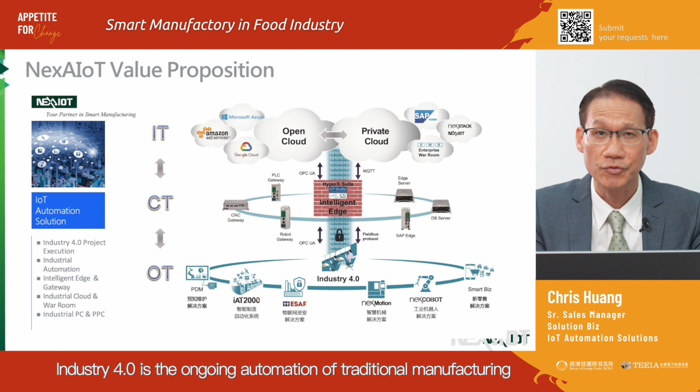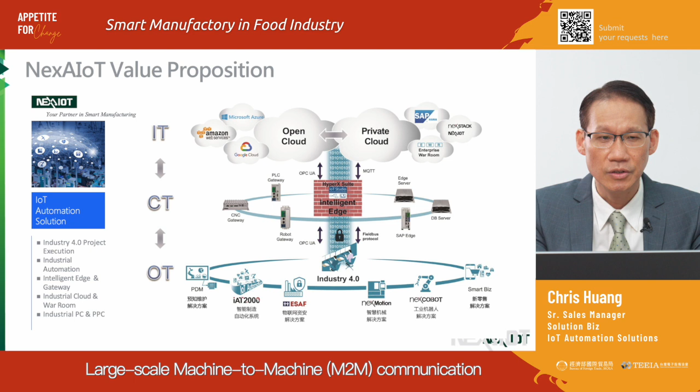NexAIoT value proposition: Industry 4.0 is the automation of traditional manufacturing and industry practice using modern smart technology. Large-scale machine-to-machine communication and Internet of Things are integrated for increased automation, improved communication and self-monitoring, and production of smart machines that can analyze and diagnose issues without the need for human intervention.

NexAIoT value proposition: NexAIoT products cover Industry 4.0 solutions and focus on Industry 4.0 project execution and service. In the current situation, most traditional manufacturers are located in the low OT layer, which includes product manufacturers, machine makers, automation, production lines, and retail solution providers.

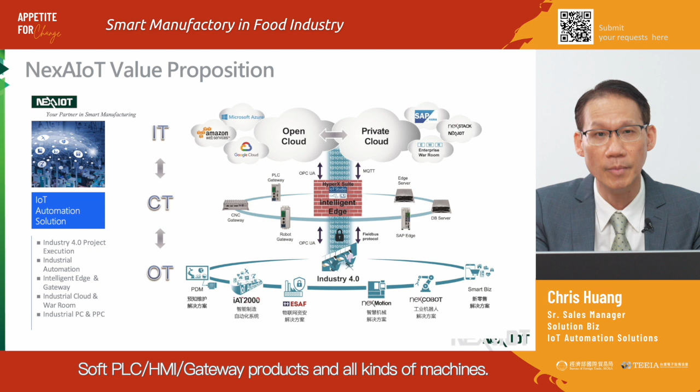In the OT layer, Nexcom provides PC-based controllers, software PLC, HMI, gateway products for all kinds of machines. In order to enhance the intelligence of OT layer solutions, Nexcom offers a wide range of gateway products, such as CNC, robot, and PLC gateway.

Additionally, they provide the Edge server and DB server products that facilitate seamless connectivity between on-site equipment and the control room server, as well as enable the secure transmission of data to the cloud.

For the IT layer cloud-based solution, there are open cloud and private cloud options in the market. Open clouds are Google Cloud, Microsoft Azure, and Amazon. Private clouds are SAP, NexSTACK, or other private company clouds. iAT2000, cloud SCADA, and automation system.

Automation and machinery system: to implement traditional manufacturing and improve efficiency, Nexcom has HMI, PC-based controller, software PLC controller, and redundant PLC product solutions.

Integrated system: to collect local data information from the field side, Nexcom has PLC gateway, CNC gateway, robot integration gateway to get machine data into Edge server computing or iSCADA.

Edge service: Nexcom Edge server specializes in collecting data from machine, PLC, and local devices, and presenting the result on iSCADA. Moreover, their solution goes beyond simple visualization, as they also enable seamless integration of data into the cloud.

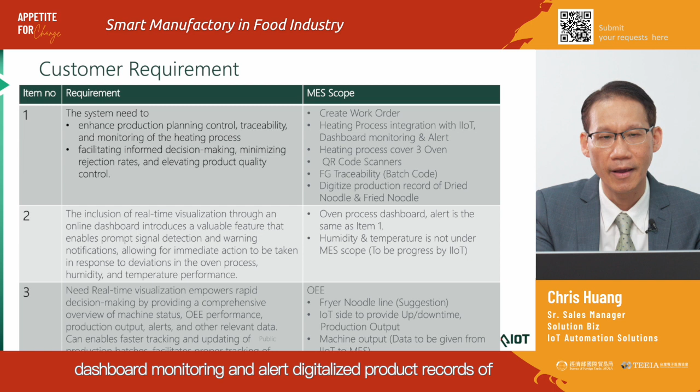Implementation by MES system: it can create work orders, monitor the heating process, integrate with IoT dashboard monitoring and alerts, and digitalize product records of dry noodles and fried noodles.

Number 2: need real-time visualization, empower rapid decision-making by providing a comprehensive overview of machine status, allowing for immediate action in response to deviations in oven process, humidity, and temperature performance. The implementation of these requirements, the oven process dashboard alert, is the same as item 1; humidity and temperature will be processed by Nexcom IIoT.

Number 3: need real-time visualization, empower rapid decision-making by providing a comprehensive overview of machine status, OEE performance, production output, alerts, and other related data. This enables faster tracking and updating of production batches, facilitates proper tracking of material flow, and allows for swift decision-making to predict delivery timelines more efficiently.

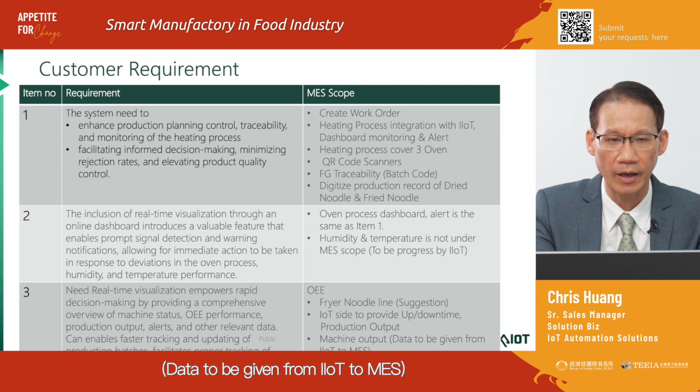Implementation by OEE system: Nexcom IoT side provides uptime/downtime, production output, and machine output data to be given from IoT to MES.

Number 4: implement IoT and weighing QR system in the premix line to have real-time data connectivity to server and MES. The QR code combined with weight data will be verified before continuing the mixing process. The MES scope will be recipe control with weighing machine integration for the premixing line. The total premix and mixing station will need 3 PCs, 1 barcode printer, and 3 scanners.

Number 5: integrate IoT hardware, sensor devices, and QR code scanner in the oven heating line. This will improve real-time monitoring of temperature and ventilation status with intelligence features for prompt alert systems to show abnormality in the oven process, reducing unnecessary downtime. Real-time data hourly auto-records the temperature result, and QR code accurately traces the trolley for heating time process. The above requirement will be integrated with the Nexcom IoT software.

Integrate the existing ERP with the production MES system, which will integrate automated stock code master software. Number 6: integrate the existing ERP with the production MES system. To satisfy this requirement, the Nexcom IoT team will integrate the existing ERP with the production MES system.

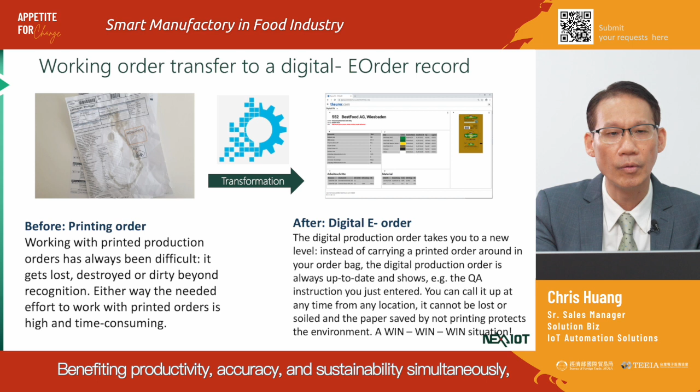The adoption of digital production orders elevates operational efficiency to a new high. Unlike carrying around a printed order, the digital production order remains consistently updated and displays real-time information, including recent entries and QA instructions, accessible from any location and immune to loss or damage. This digital solution not only safeguards against data loss but also reduces paper waste, making it an environmentally friendly choice. It's a win-win solution, benefiting productivity, accuracy, and sustainability simultaneously.

The current manufacturing process: it shows the current manufacturing process, the flour premix preparation mix. The worker needs to record the raw material flow usage and how many kilograms are used. At the noodle steamer cutter, the worker needs to write down the steam temperature, cutter speed, oven temperature, and oil temperature.

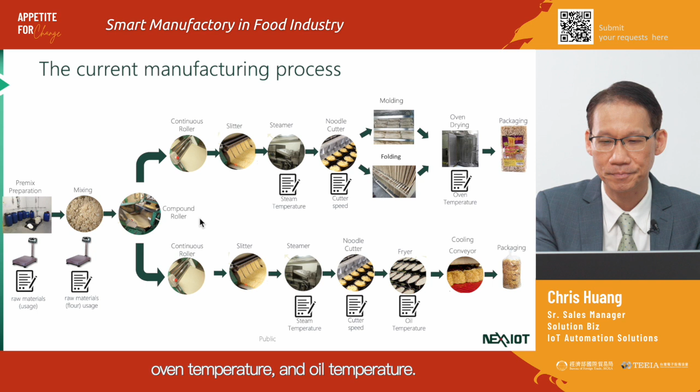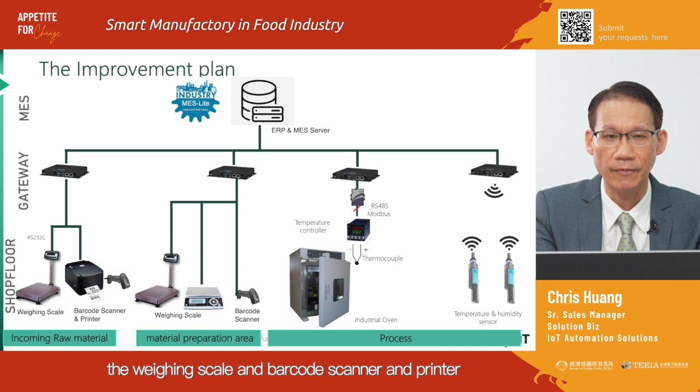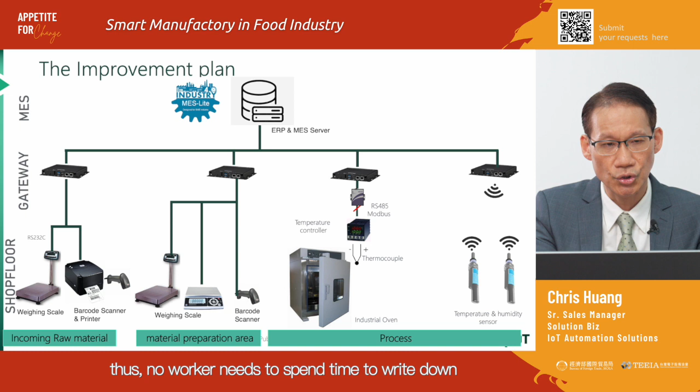The improvement plan: for incoming raw material, the weighing scale and barcode scanner printing machine device connect with a gateway device, which records the incoming flour, oil, and other material information. This information will be collected and put into the MES system. Previously, the worker needed to spend time writing it down in a worksheet.

The weight scale and barcode scanner records the noodling, and also the flour premix preparation. Mixed data information will be collected and put in the MES system. No worker needs to spend time writing it down in the worksheet as well.

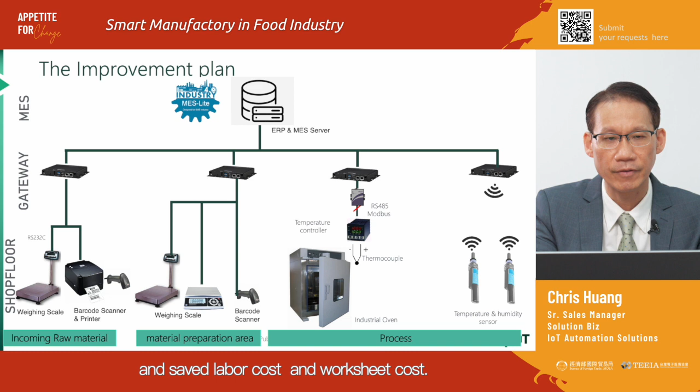During the process, the industrial oven temperature is recorded by a thermal device sensor. The environment temperature and humidity sensor transfer the real-time record to the MES server. All the records are entered to the ERP server automatically, saving labor cost and worksheet cost.

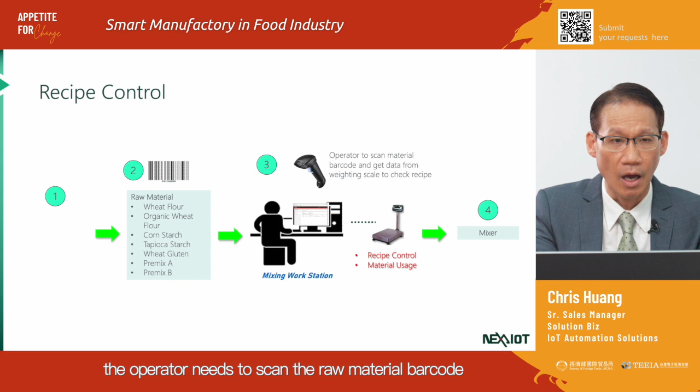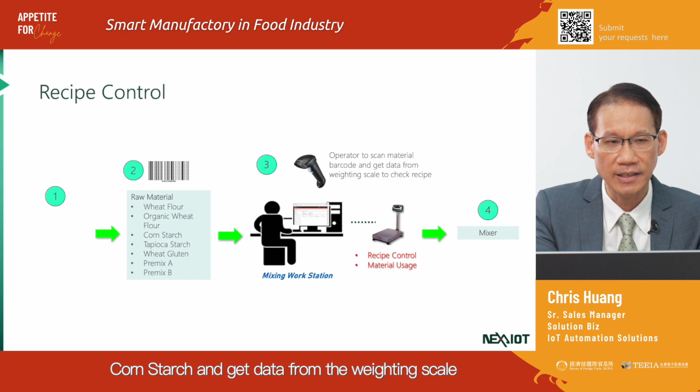Recipe control: with this process implemented, the operator needs to scan the raw material barcode, like wheat flour, organic wheat flour, corn scratch, corn starch, and gather data from the weighing scale to check the recipe and control the material usage. All the data is transferred and stored in the MES system.

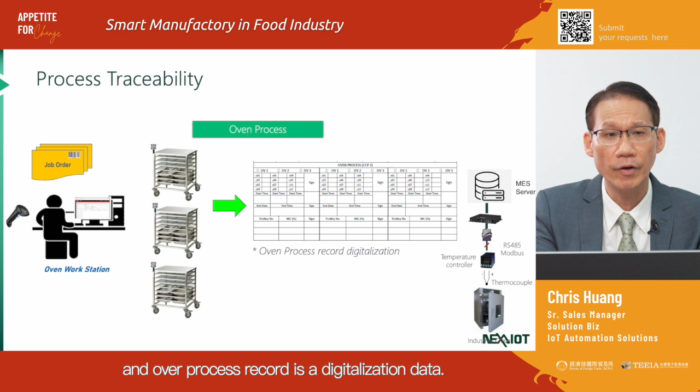Process traceability: the industrial oven temperature, environment temperature, and humidity sensor real-time records are transferred to the MES server. The process record can be traced, and the oven process record is digitalized data.

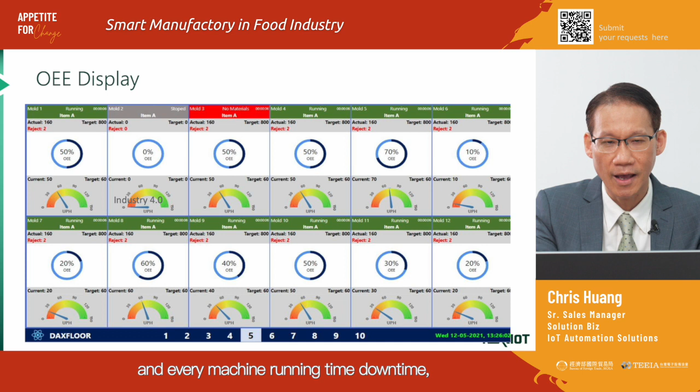OEE display: with the improvement plan, the overall equipment effectiveness (OEE) can be displayed in real-time on the screen, and every machine's running time, downtime, and idle time can be shown on the screen.

Nexcom is an Industry 4.0 leader. We have integrated our IoT 2000 cloud SCADA system in the Nexcom factory. The trend of Industry 4.0 has widespread adoption as the global policy for leading nations. Nexcom has devoted itself to Industry 4.0 since 2012 and develops automation, IoT, and cloud technology for customers. We are willing to provide our Industry 4.0 service for all worldwide customers. Thank you.